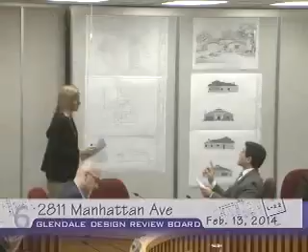Go ahead. Okay, this particular project involves the construction of a new one-story, approximately 1,900 square foot single-family residence and an attached two-car garage on a triangular-shaped, approximately 7,000 square foot lot zoned R1 single-family residential, floor area District 2. The project site currently has an old pool house and an old pool.

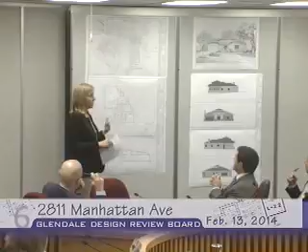Those structures will be demolished as part of this proposal. The demolition was evaluated several years ago. This particular project site previously had a case submitted back in 2008. It never went forward, but at that point the demolition was evaluated and found not to be a historical resource per CEQA as well.

Noted. There's one existing oak tree on the site, and there are several oak trees to the rear on the adjacent site, plus one large pine tree on the corner of Manhattan and La Crescenta.

If the site looks familiar, the Design Review Board previously reviewed two single-family residential dwellings, both facing La Crescenta at 4025, and also 2801 Manhattan, which was on the corner of Manhattan and La Crescenta. Both of these new single-family dwellings were approved back in 2013.

This is the last remaining site of the three parcels, and the same developer is developing this particular site. As you'll notice, it is triangular in shape. They have a two-car garage facing Manhattan Avenue, and the interior property lines, because of the angle of the slope, are staggered backwards.

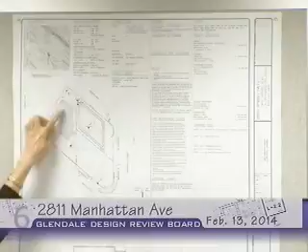It is a three-bedroom house. The living room and family room take advantage of that small piece of the triangular lot as their rear yard. Because of the site constraints—the triangular shape, the existing oak tree, and so on—the site plan is constrained, and this would be the building footprint of the lot.

In terms of mass and scale, it's a one-story structure with an overall height of approximately, I believe, just under 20 feet. The elevation drawings don't have it here.

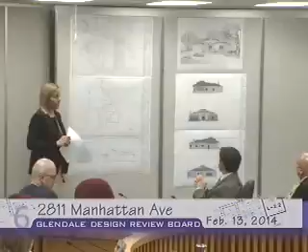In the board's previous discussions for the two other single-family dwellings, comments were made that this would be appropriate only as a one-story structure. Neighbors also commented that due to the existing neighborhood characteristics along Manhattan Avenue, a one-story design would be appropriate. The developer has come in with a one-story proposal, so in terms of mass and scale, it fits within the neighborhood.

Last but not least, the house has been designed in a craftsman style. It has siding, and you'll notice they've incorporated river rock from off-site and from the existing structure. You also have clipped gable roofs to better help the overall mass and scale, to tone it down.

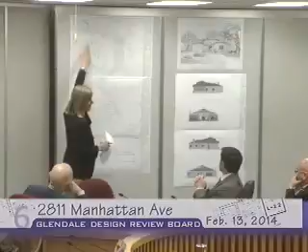There had been a previous proposal with just gable ends, which looked a little stark and massive. When these gable ends were clipped, there's more of a graceful feel to the street and a lowering of the overall height. You'll notice the roof lines—because of the span of the one-story structure, there's a larger span in the center, and as the building goes backward and staggers toward the corner of the lot, it gradually tapers downward.

Staff believes that this particular proposal, along with the colors and characteristics—there's a bit of blue toward the garage door and front door, and more of a gray palette as opposed to earthy tones—would not be inconsistent with the rest of the neighborhood.

With that said, staff believe this house would be appropriate and compatible with the surrounding neighborhood, and we recommend approval with conditions, the two conditions being that the windows be framed either with wood or HardiePlank trim and sills, and that perhaps the developer would consider upgrading the window material from vinyl to either fiberglass or aluminum or whatnot.

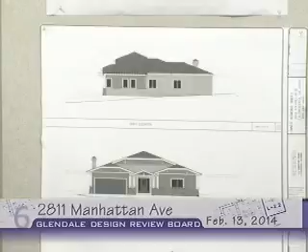So that said, concludes staff's presentation. I'm available to answer any questions you might have.

Do we have a material board? Yes, in the case packet. Also, the entry has a high ceiling in this area, and then there's this kind of mass. Is there a particular reason why that's there, or has that been discussed?

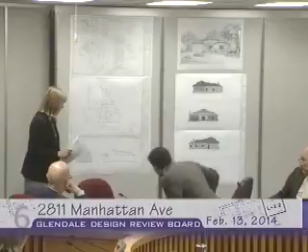The reasoning for that, I'm going to let the designer, the developer, answer that question. But yes, the actual entry foyer is 2-story. Okay, just if we get the picture, I will bring it right to you.

I have questions. Is the house 2000 or 1889? 1889. Okay, yes, 1889.

And would you like the neighborhood photos as well? Yes. So while staff is getting that, our first speaker is Kendall Hales.

Good evening. Thank you, my name is Kendall Hales. I'm the applicant for this project. This is the last of the 3 lots that we are going to be building on, and I appreciate the input from staff on this project. They've been really helpful. I was trying to put a 2-story in.

I actually had a design trying to do something with a very low second-story roof, wanting to take advantage of the backyard. But in talking with staff and going back and forth, and knowing how the neighbors feel about it, we tabled that and came up with a single-story design. We get less yard, but I think for the most part, most people will be happy.

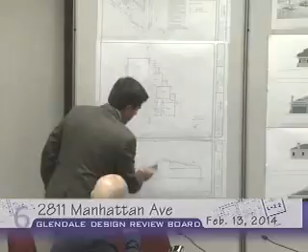And I'll ask the question again now. So we have kind of this drop ceiling, and then we have this void space up here, which is adding this area to the facade. What was the primary reasoning for having this drop ceiling, this raised roof? I'm trying to understand, you're looking at the section there.

Overall, that space I don't think is that significant. I wasn't really thinking about having a two-story feel going into the entryway when we designed it. I haven't even thought about that at that point. I was more concerned about some symmetry in the house and how it looked from the street. Dealing with that space on the interior is something I'll deal with when I get to the construction documents and talk to the engineer.

So much the interior, but of course when you have a higher roof level, and then you have a void space, an attic, and then a drop ceiling, the higher the roof gets, the bigger of a height the attic space gets, the more bulk and mass you end up with in the building. I was wondering if there was any specific reason why you had that. Well, as you look at the width of the house, behind the two front protrusions, we just covered the roof from one side of the house to the other, using a low 4 and 12 pitch roof, and that's just where the peak ended up. So that height was just a matter of how we covered the whole structure from left to right, keeping a low pitch. I don't think there was any premeditation in creating a voluminous space, that's just how the roof lines worked out with the floor plans we were dealing with.

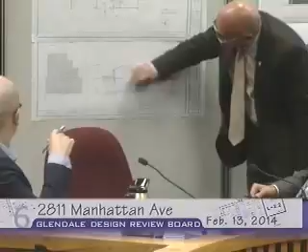How high is that, by the way? It ends up being about 18 to 20 feet, 18 to 19 feet I think. How high is this attic area right in here, right in the very front? That would be maybe 12 feet. You're talking about the fascia board? No, I mean the attic area that you've created right in here, what is this dimension right there? That's probably 4 or 5 feet max. More than that, looks like 7 or 8.

As you can see on the front elevation, that front roof is clipped. Going back to Mr. Simonia's question, the second story void space is basically this area, but as you see, the roof line is clipped back, so it actually goes up at an angle and comes down low in the front.

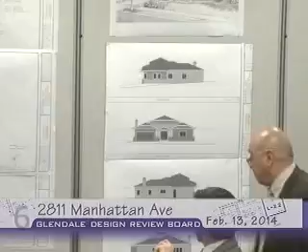This is the updated one?

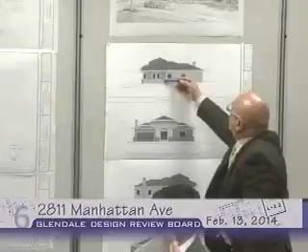And how are you treating, Mr. Hall, how are you treating this edge here? Is that you have a sill, or does it protrude out? Is that the stone? That's the wrap around stone, in that elevation it just kind of stops at that sill line.

I can't see it from here. Well, you could come up if you would like. Yeah, let me look at it, it's been a while since I've used these things. You don't look into that.

Oh, this right here? Okay, typically what I would do on this, since I've got siding and stucco underneath it, we would run a water table all the way across here, and it would come in underneath these windows. So there would be a water table break between the stucco and the siding.

Since we got some updated drawings recently, we're going over some of the information which wasn't originally in the plans.

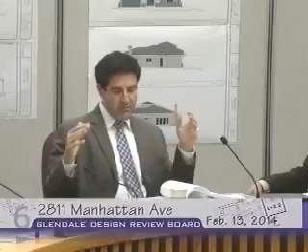As an overall question, looking at the three projects together, when we analyzed the first project, the corner one, it had very intricate craftsman details, quite a bit of detail. The second building had a little bit less. And this third proposal is even more bare bones, almost value engineered, and doesn't possess that ornate, wonderful craftsman detail the first one had. So I was wondering why, as we move closer to the more historic home, we're losing some of that craftsman charm.

I can explain that. Some of it is because it's a single-story house. With two stories, you have more space to do detailing, and with gabled ends you can do nice detailing in those. With a single-story house like this, a third of the front is a garage door, then the rest is the house, and we clip the gable ends to keep the massing down low. So when you're trying to keep the mass down, it doesn't allow enough square footage to add detailing.

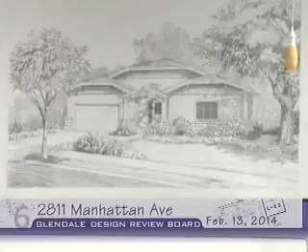But if you notice, we do have a lot of materials going on in the front. We're using natural stone as a nice wainscot around the front, and above the windows and below the fascia we're using a nice cedar shingle look. As you'll notice, it's better seen in the perspective over the entryway, where we have an interesting detail with the open rafters over the front door.

So I think with the space we had, we have a lot going on. There's a point where you could put too much in it, and I didn't feel it was necessary around the sides because there's not much to see there. Again, it's a single-story roof, so you see roof and then it comes down to the side of the house. I feel we did a nice job putting some nice features and details on the front with the corbels sticking out. I think it's better seen in the perspective than on the elevation—the elevation's a little deceptive, a little flat looking.

Mr. Bush, please go ahead. You're going with that window? Yeah, I actually gave Billy the other copy. I think we put the wrong colored rendering up because the window's not changed. But it is—see the upper window, it's in thirds? Yeah, that is the one we will be doing. Okay, I like that. The colored rendering doesn't reflect that, but it is.

Mr. Hall, have you explored—I know you've done a wonderful job in the front, that's my feeling about it—but it loses it on the side. This character home of such style should continue the roof treatment on the side and the back. Now, have you explored doing gables in the back? Because it feels the back piece is a separate piece from the front, with no cohesiveness wrapping around the building.

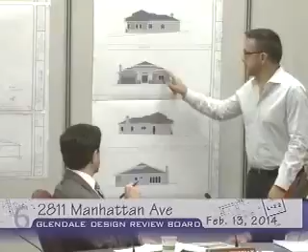Again, we could do that, but the Design Review Board is to make sure the community has a house that looks really good from the street. What it looks like from the back, and especially what's behind that house, is a 20-foot block wall, because there's the apartment building behind it, and there's no windows or anybody that looks out into that backyard. So I don't know if it's really necessary at that point. It could be done, but I don't see a necessity for it.

Well, we have some speaker cards from the community, so why don't we move along? Go ahead. And thank you, Mr. Hall. Bless you. We'll have an opportunity for a rebuttal as well, and we'll kind of keep the hearing moving along and explore some of these questions maybe a little later while we're convening on our own and talking about it, the discussion portion.

Thank you. Next speaker is Ruth Enslow. She requested that her speaker card be taken back. Okay, actually, so apologies, here, I'll take that request. Granted.

Barbara Hannigan. I'm Barbara Hannigan, I live at 2819 Manhattan, which is directly adjacent. You can see the side of my house right here. And we've met with Mr. Hall and really appreciate the design. We've really appreciated that it's a one-story. We really have no major issues with it.

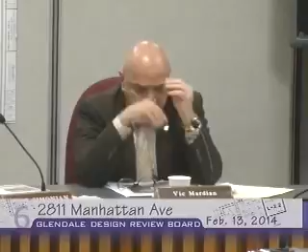Yes, Mr. Chair, I want to ask Mr. Morgan a question. Thank you for refreshing—these are refreshing pictures. Nice to have the pictures.

I happened to review this when I was on the Historic Commission in 2006, and if I'm not mistaken, the commission went through a lot of review and research. We also talked to the building department. This building is not habitable, and if my recollection serves me right, the structural integrity was gone, based on our analysis at that time. We went through a lengthy discussion on this structure, and the commission found that the structure was not significant due to neglect, and that it is not habitable. Structural integrity was lost, and we determined that it was not historically significant.

I wish you were at that time to voice your opinion. I did—then, and I've done so ever since. But like I said, it's 108 years old, and obviously in 108 years you could lose historic value. Even thinking of relocating it, it would fall apart by the time you relocated the structure. That's my personal opinion, though.

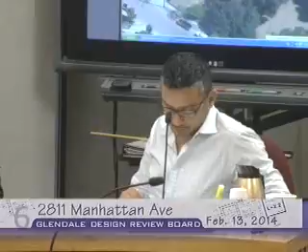I think it's beautiful. And Mr. Mardian said if we could carry some of the details, especially to the back. I mean, I could imagine myself sitting in that backyard, even though it's small. I would want to feel that - feel the house from the front carried into the back, because it looks really, really plain in the back.

That's it for me. Not only so much the plainness, the simplicity is fine. It just feels to me that it's just two separate structures. Yeah, that's the key. The roof is creating that. And if there is a way, I'm sure he'll find a way - Mr. Hall is creative enough to come up with these designs and quality. I think you can incorporate that in the back somehow.

I think the back looks like the side. I mean, you couldn't be able to tell which one's which. Sure, I have a question for staff - what is the maximum overhang of the roof into setback?

The maximum, in inches - the roof itself, 30 inches. It would not be closer than 30 inches to the property line. I don't think that the wedge of the roof is 30 inches, to be honest with you. I think it's over - it's almost 3.5 feet.

The required setback for an R1 home is 6 feet. So right now, if it has a 36 inch, 3 foot, 3.5 foot overhang. I'm not questioning it. Only reason I'm saying this is based on this 1 foot, if you take this, assuming that this is the 6 foot, and this is the edge.

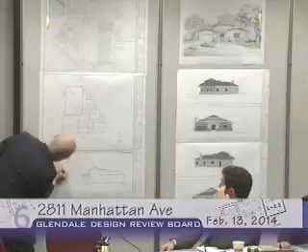I'm going to try to see if I can see it in this plan. These are the corners. You take this, and you come out 30 inches, because this is 1 foot. So 1, 2, 3, or based on that, I'm guessing about 3.5 to 4 feet of overhang.

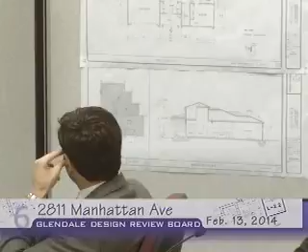Again, this brings it back to the roofing of the back area. I think it will really help the project if the front roof and the back are consistent and work together, and don't create two separate buildings, front and back. I think that area definitely needs to be looked at. I could be wrong, but I'm just going based on the dimensions that are there.

If the board members could give us some guidance on that, because we definitely recognize the same issue you're finding. But the insertion of gables on that very complicated, staggered rear facade started introducing some strange geometries. What we found was the hipped roof was kind of the lesser of those evils in some ways, because we felt it was very respectful of the neighbors in terms of pushing the massing toward the edges of the site. So if you want to condition a roof change back there, it would be very helpful for us to see if you have any more specific guidance than that.

Very good. Well, so it's now my turn to talk, and I'm going to try to integrate some of those items in there as well.

Overall, this is a very unique opportunity for us, not only because of its adjacency to a somewhat important building that's been present in the neighborhood for many years, but also because there were 3 lots, and we've really seen 3 separate applications come forward. And that in itself is unique, because we didn't have them all at the same time. We had them one at a time.

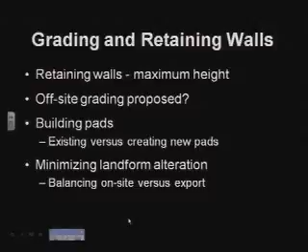There's been a lot of discussion of balancing grading on site versus exporting. Given certain properties, sometimes it actually makes more sense to export than balance on site in terms of impact upon neighbors, and we'll go over some examples of that. A lot of question comes up about how much is a cubic yard, so we wanted to provide a visual example of how much a cubic yard of earth movement could look like. The way we calculate earth movement is cut plus fill, which is how we look at grading.

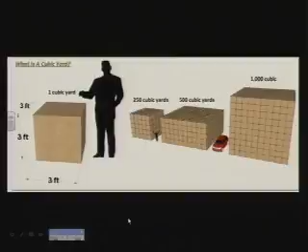And I'd like to turn it over to Jan Baer to discuss some of the basics of the building code for retaining walls.

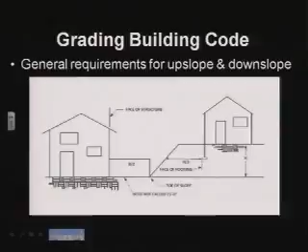Just to clarify, Mr. Mayor, the H over 3 is for the purposes of the footing location. Right, it has nothing to do with the height or the toe of the slope. Right, yeah, it has to do with the edge of the building. Okay, and the depth that footing has to be to get protection to the face of the slope.

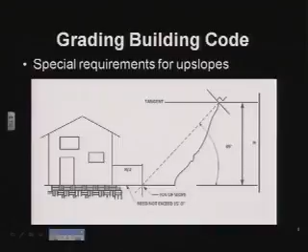This one has a special requirement for upslopes - Santa Monica, near the beach, where you see the great cliffs. Well, this would require, if you're on the bottom of one of these cliffs, it'll make you build a little further away. We assume that things are going to fail to some point, and we now calculate using a 1-to-1 slope from the top of the slope down, and then you measure your setback from that. So you end up with bigger gaps between steeper slopes.

The next one is also an example of that, where if you're on the top of a hill, we'll use the same requirements to require deeper footings just for protection. I know in the rains there were a lot of pictures of some of the failures up in San Clemente and up north where the slope came away right at the hillside and you saw very deep piles. That was a good example that they prepared themselves - they built their footings deep enough, and the building basically still stayed there after the slope failed to the edge of the building.

Mr. Bear, are there special maps that identify these hills where it goes beyond the 15-foot setback from the toe, and then you have to use this 1-to-1 trajectory? We do not. A survey of any lot will show what the slopes are. If you go out and do a survey and you are next to a granite slope that's at a 1/2-to-1 slope, very vertical, then these would apply. But at the same time, they may have a lot of stability in that your soils engineer, your geotechnical professional could identify where they may come up with an alternate solution. But we first go to the basics of the code.

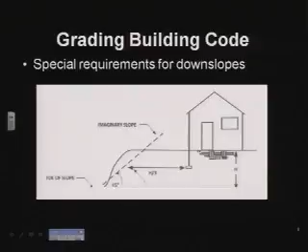Got it, so it's basically prescribed by the soil engineer and the geologist. When a soils engineer and geologist come in, they can make recommendations based on site testing, geologic maps, that maybe there's some stability where some of these can be adjusted. But without that specific review of the site, we're going to go back to the code minimums. Thank you.

Which concludes my portion. Okay.

I will repeat that. This is a portion of our zoning code that talks about upslope retaining walls. If you have a house in an upslope condition, we measure that from where the street is. In this case, the street would be at the bottom of the page, and the house would be upslope from the street. If you have a structure blocking the retaining wall to the rear from the street, you could have a maximum height of 15 feet.

We also have interior setback requirements for retaining walls. If you're within 5 feet of the property lines, the maximum retaining wall height would be 3 feet. Beyond that, it would be 5 feet, except of course if you have a structure blocking.

This is just a diagram that shows what you would have in an upslope situation. If you were putting a wall in front of a structure, you would have a maximum height of 5 feet. You may go up an additional 2 feet if the wall is parallel to the street, including any additional freeboard, for a maximum height of 7 feet.

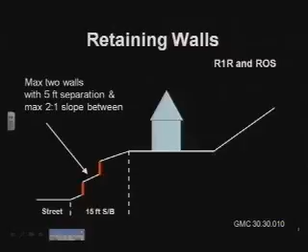And if you had 2 walls, you would still have a maximum 5 foot for the retaining walls, but there would be a 5 foot separation between the walls and a maximum 2-to-1 slope between those walls.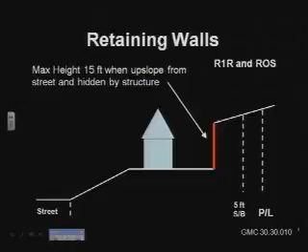Again, this is a situation where you would have the upslope to the rear of a house. You can also have multiple retaining walls, again maximum 15 feet retaining to the rear of a house when blocked by the structure.

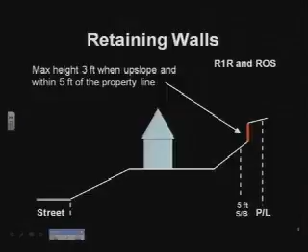And again, if you're within 5 feet of the property line, maximum height would be 3 feet. Now, this is right from our zoning code. This talks about downslope conditions, and again, downslope would be measured from the street.

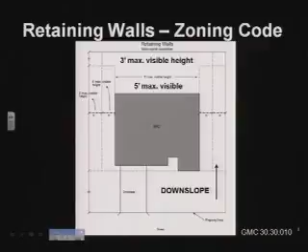You would have a 5 foot maximum visible to the rear of the structure. If you're within 5 feet of the property line, it would be maximum 3 feet. This is just a depiction of what that would look like from the street. If you're within the front setback, maximum of 5 feet.

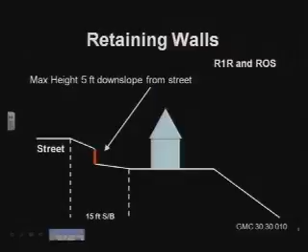Like a situation Jan was pointing out earlier where you might have step pads, it just depends between the homes what your setback would be. That would determine the maximum height of your retaining wall.

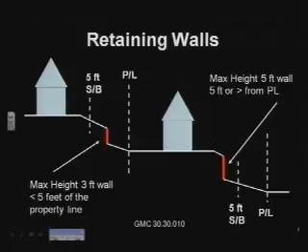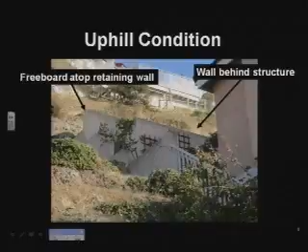The question that I have is, can we incorporate the retaining wall into the building, bring the building in so that it becomes the back of the building, nestled into the hill? So the first floor, let's assume hypothetically, is the retaining wall that is holding the earth. And then the second level, we would have that 15-foot setback or certain conditions there.

There are many options of where you place the retaining wall to create your 15-foot setback, which is kind of the catch basin side. Much the same way on a downhill slope, you can deepen your footings to get closer to the edge. On the uphill side, you can do structural alterations to your building that could even allow the building to be

a retaining wall that creates the setback itself. You would not have any windows in that wall. It would be a solid mass, but it would be the back of the building, and that is an option. So if we get a project and we force them to do that, we should be okay to maintain the hillside guidelines and other requirements. And we do have some examples of buildings like that we'll be showing you.

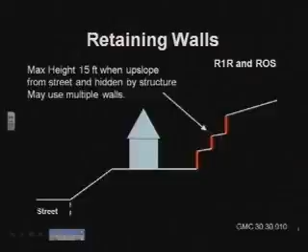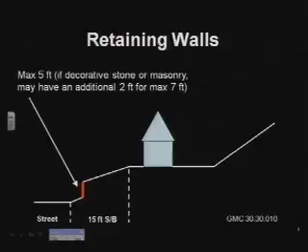But if it's a cut condition in the front. And again, there's a saying in the planning department that all planners know: you can cut, but you cannot fill. So you cannot create a situation in which you have a wall and you backfill in the front setback. So just to make note of that, you are allowed essentially an 18-inch wall or planter wall above any existing grade. But if you do have a cut condition with a 5-foot wall, you can go up to 7-foot maximum if it's decorative, but any other time that you cut, you can only have an 18-inch maximum with freestanding or planter wall.

This is above retaining the existing slope, and when you cut it, that is where the 18 inches comes in play, because there's a maximum height for any fence walls or retaining wall, no more than 18 inches in the front setback. So how does that play with... Again, unfortunately, this is where there are 2 code sections that are at opposite ends, but because this particular code section allows for an overall height of 7 feet, we would be able to grant that 7-foot overall height. So 7 feet.

One of the goals that we have is to reduce retaining walls where possible. So we have a variety of methods that planning hearing officers have used to do that. We've looked at berming, use of split pads, going with a grade for things such as driveways, and also we've looked at landscaping alternatives for retaining walls, and not only retaining walls, but also handrails and guardrails.

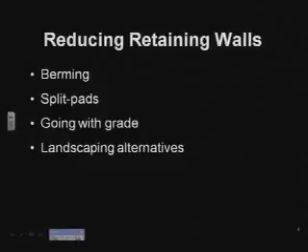So when we look at a site, we look at whether retaining walls are minimized. Is there a way to reduce the number of walls? And again, these are just things that we've seen out in the field. A lot of these are not permitted under code now. We've had numerous years where we've had different iterations of hillside ordinances. So we're not saying anything is illegal or anything like that. We're just pointing out that when we look at plans, we look at it in terms of, are we really doing what's right for the neighborhood? Are we really minimizing impacts?

Laura, has there ever been a restriction on the square footage of retaining walls relative to the lot size or house size? I noticed some of these might be. I'm not familiar with a restriction that would limit the amount of retaining walls to the size of a lot.

One concern we have, especially on hillside lots, is how pedestrians access a site. If you're using a driveway that's relatively shallow, it's easy to walk up, but a lot of these driveways are quite steep. How do people get there? So when looking at a site plan, if you see pedestrian access, what would the drop be?

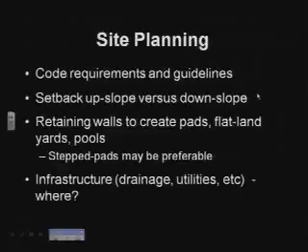Then our tools—what are our tools to do hillside policy? We have Glendale Municipal Code Section 30.11.040, our residential standards. As part of our residential standards, we have a hillside development review policy with 5 considerations we need to look at. In Title 16, we also have regulations relating to ridgeline, protected ridgelines, and blue line streams.

In your staff reports, if any of these issues come up, you'll see recommendations on those. Those recommendations used to go to the planning hearing officers, and now you'll see them as part of your reports.

So the hillside development policy is the key policy we use. It requires that development shall be in keeping with the design objectives in the Glendale Municipal Code. The hillside design guidelines and landscape guidelines for hillside development are now adopted and may be amended from time to time by council. Development shall also be compatible with surrounding neighborhoods in terms of size, scale, bulk, mass, roofline orientation, setbacks, and site layout.

Site plans shall show preservation of prominent natural features, native vegetation, and open space in a manner compatible with the surrounding neighborhood, minimizing alteration of terrain necessary for development. Site plans for development on steep slopes shall also take into account the visual impact on surrounding properties, and the architectural style and elements of infill development shall be compatible with the surrounding neighborhood. Those are our considerations.

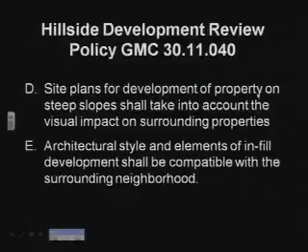I think these 5 items are extremely important, and it's great that you're pointing them out. They're, in essence, the hillside design development guidelines we go with, and this is exactly what we try to analyze as we're looking at hillside projects that come before us. When I made the point earlier about preliminary submittals, sometimes projects come before us that absolutely took the wrong turn and are placed totally at the wrong spot. Not only are they not terracing into the hillside, but they're creating a lot of mass and bulk, turning into something you would place in suburbia, but in the hillsides.

And that's exactly when it becomes difficult to work with an applicant like that, because they're so far along. Whereas at the preliminary stages, it would be much easier to comment and save applicants time and money to take the right approach.

Well, as Tim was saying, that's part of the reason why, as a streamlining effort, if all of that authority is placed in one body, which would be the Design Review Board, it gives you a lot of flexibility to deal with various site characteristics where perhaps your hands were previously tied. So this gives you more flexibility, and the code was amended to give you all the authority to do that.

We also have the hillside design guidelines, which are part of the comprehensive design guidelines. Similar direction applies: follow topography, minimize landform alteration, and discourage the creation of yards through use of retaining walls. It also encourages minimizing retaining walls, as well as some direction for landscaping materials. Due to the hillside, fire and slope safety often come into play, along with the types of designs and materials that can be used.

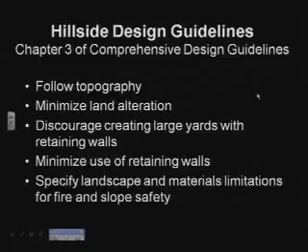There's a pretty recent change that occurred in design review having to do with privacy, so we'd like to point out those issues. I know you're familiar with them, but those are also in the code.

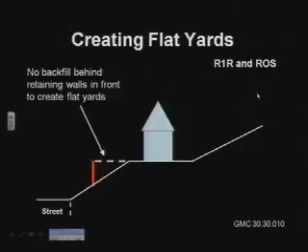But if I have a substantial setback in the front, I can't do that? If it's outside 15 feet, then by code it would be permitted, but that would be something staff would take into account when considering whether we could exempt it from design review. We've seen a couple of projects that face both sides of the street, where you've got the downhill side and the front, although it's technically the rear.

Here are some examples we had in the past, before we had hillside review, just showing the idea of whether a design minimizes mass and bulk on a hillside, and whether a home follows the topography.

For driveways and access, the maximum driveway slopes are between 15 and 20%. We also have an issue sometimes when we review projects: it may meet the zoning code, but when we bring it to engineering, they'll discover a sight distance problem at the street. If we see that, we'll point it out on any plans. There's also concern with pedestrian access and fire department access for long driveways.

Going back to the question of whether we can change things beyond our purview: for some of these R1R, ROS lots, by the time you minimize grading and reduce retaining walls, you may end up requiring more slope than proposed, like 21% or 21.5%. Is that something we can look at, to work with reducing grading and retaining walls for environmental reasons, using the 10% leeway that can be given to applicants to reduce impact?

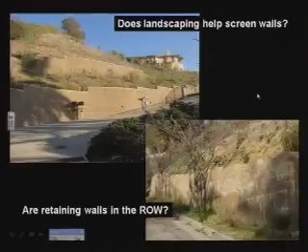Now, are we making best use of screening using landscaping? Are we putting retaining walls in the right-of-way, which we generally do not allow? Are we putting a driveway in a location that really minimizes the location of walls? Are we putting it at the top of the slope where perhaps we don't need such a large retaining wall? It's an old house there.

Is this a very old house? Yeah, I know that one. But some of these same issues come up because you're going to see development on lots that have not been developed on before. These are just ideas to keep in mind.

These are things that we see out in the field. We're not saying this is permitted now, but just an idea of why the laws were changed and why we have these hillside standards. We're always concerned if we're creating a corridor driveway—do we really need all the retaining walls, or is there ability to reduce them?

Also, we know there is a practical need to make sure there are trash areas where people can store their trash outside of the public right-of-way, outside of the front of the home. People design nice walls, nice houses, and then they put the trash in front of them, especially if they're creating an area that's for permanent storage.

And the issue of drainage and infrastructure—one of the issues we have as planning hearing officers is cross-lot drainage. Are all the needed infrastructures or improvements shown on the plans that you see? Are there going to be additional walls or devices near catch basins that aren't shown on the plans that will show up later?

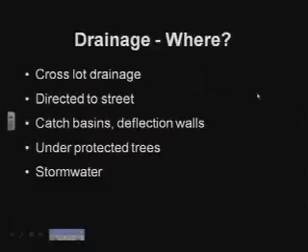And again, in terms of site plan, will there be infrastructure in public view? In this case we have public infrastructure. Or will private infrastructure be in view? In this case, we didn't look at drainage from the backyard, and apparently it goes down the street too. So these are things that, if we had addressed during the site plan, we could have made them route down the driveway or something so it wouldn't impact the street or the neighborhood.

And just environmental issues in general—protected trees, blue line streams, protected ridge lines—those will be mentioned in the report if they're affecting the property you're going to be reviewing.

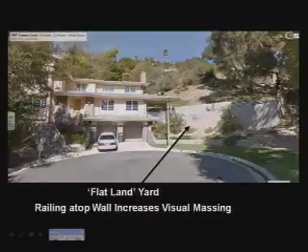So here's an example of a house built into the hill. Because they stepped it in, they reduced some of the retaining walls to the rear of the house and protected oak trees. This part of the property looks like it was quite well designed. But when you look at it from the street level, this is one of our concerns—when people cut in and put in a backyard, but then by the time you put railing on top, you get quite a massing on the public street. So we want to point out that depending on where a yard is, it could have a big impact on neighbors.

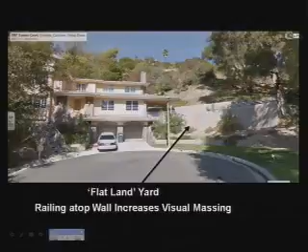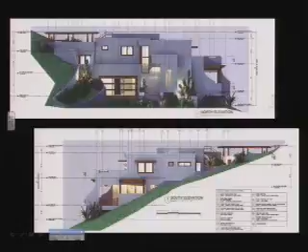And here's another example of a project where the hillside project stepped into the hill. And so that concludes staff presentation. If you have any questions, we'd be happy to answer.

I had a question on the zoning code—it says retaining walls have to be decorative. Yes, and this question has come up. So if I'm designing a Spanish house and I want to do my walls in stucco, I can't do it? I would leave that to the designer.

That's our current interpretation of the code, that stucco is not an appropriate decorative material. Personally, I would lobby for an amendment in the future, in a case where it's appropriate to the style of the house. We also hear people talk about waterproofing issues with stucco on block, but I know that's not insurmountable. So, as of now, we can't allow it.

Does that conclude staff's presentation?

Well, that was extremely helpful, especially this package you put together with all the pictures and whatnot. It's a great tool for us to keep, and everybody watching in the audience and at home, I think, learned a lot from this. So that's wonderful. We appreciate it.

Feedback, quick question: when is this active? Is it active now? The ordinance took effect on Monday.

Correct. And are there other CUP files in the system that are going to go through the old methodology, or is everything going to come to Design Review Board moving forward? Those applications submitted for a CUP under the old rules have the ability to have the applicant submit a letter in writing to request to be reviewed under the new rules. So essentially no CUP would be required, they can strictly just go to the Design Review Board. I see. So we're going to see these cases fairly quickly then, I would assume.